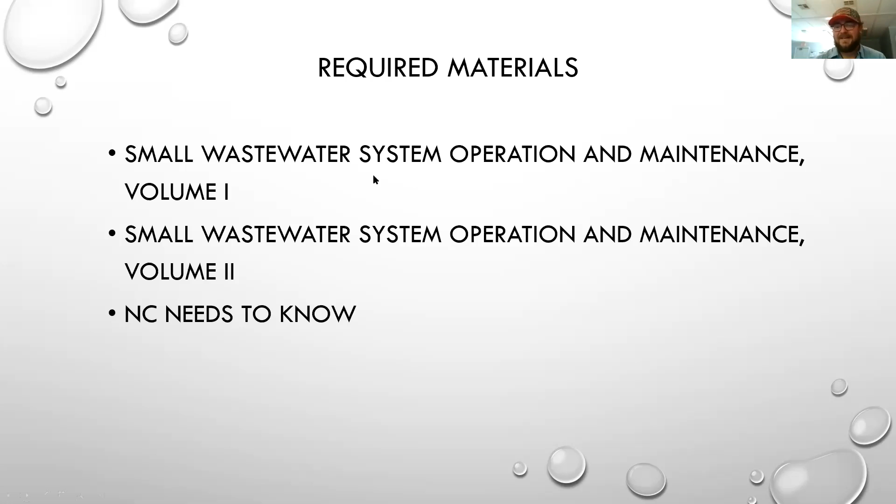In terms of successfully completing the class, what we're looking for is we want you to learn Zoom, which is this application we're using. If you look in your box, you'll see an opportunity where it says chat. You'll open that chat box, and you can see you can type something down there.

We'll be asking questions occasionally in the class, and I want people to respond. It logs and timestamps that, showing you're actually in the class and participating. So we will need you to be able to hit that chat, just keep that little chat box open. What you'll find later also by keeping it open is that it will allow you—right now you're chatting with everyone—but once you start to meet other people in the class, if you want to send just one individual a message, you can do that and nobody else can see it. So that's handy to have.

We'll also expect you to abide, since you're a Western Piedmont student, by the North Carolina Western Piedmont Student Code of Conduct, which means don't cheat on any tests. Make sure that if you attend a session, you don't have somebody else doing it for you. It's on our website. We just put it out there to let you know that we expect you to participate, and for purposes of this class, make sure that if somebody logs on in your name, that it's actually you and not somebody else.

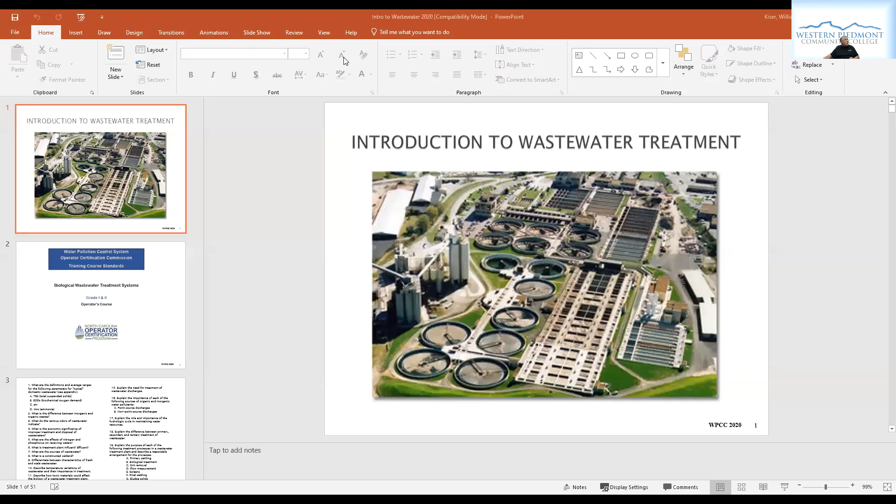When the actual class starts, it'll look something like this. In a given day, we'll have a class, and maybe we'll talk about introduction to wastewater treatment. Do you see that slide? Yes. Okay, so even though I'm looking at the camera, I've got that same slide on the board over here, so I'll be turning and writing on it, then turning back.

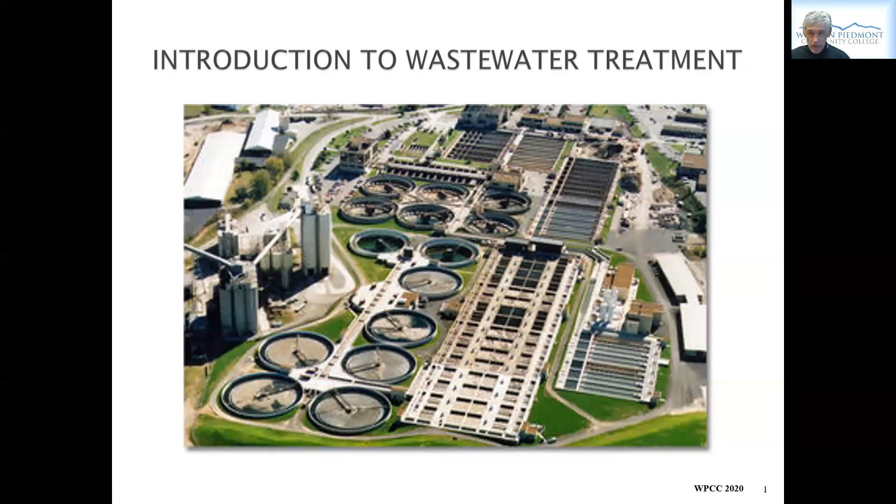There'll be a series of slides, and I'll start each slide with something called the 'needs to know,' which we talked about earlier. It's an outline of each topic we want to cover, like pump, activated sludge, disinfection, laboratory, and tells you what types of questions you might be asked on the certification exam for that topic. This is the cover page, and I'll show you how you can download this. You don't have to buy it.

We'll start off with the needs to know and say, okay, for grade 1, here are the types of things you're going to be asked that we're going to cover today. I'll start the class with this list of questions and end the class with this list of questions. For example, let me get my pen going here.

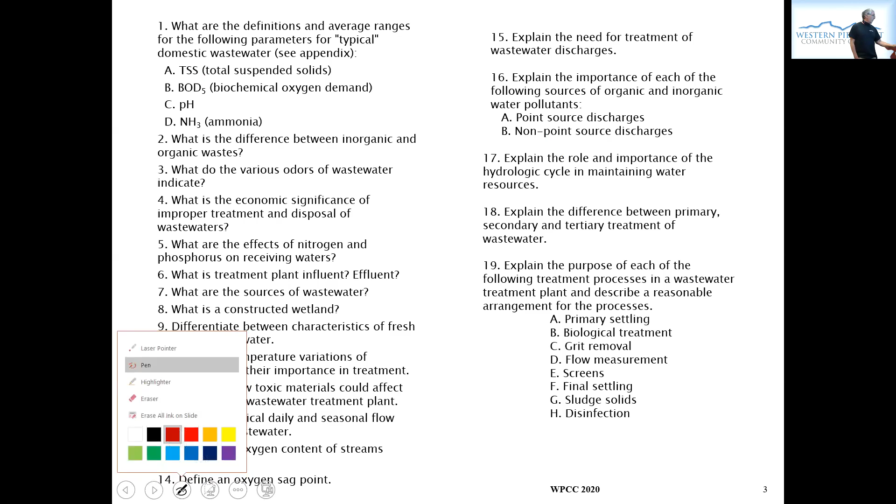The first question is: what are the definitions and average ranges for the following domestic wastewater parameters? We'll talk about that, and get my pen working, sometimes it's a little difficult. This thing gets cranky, so bear with me.

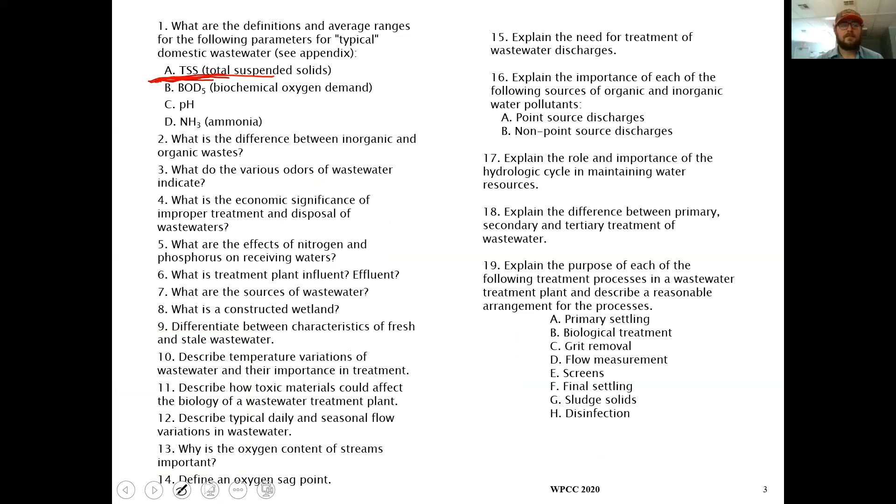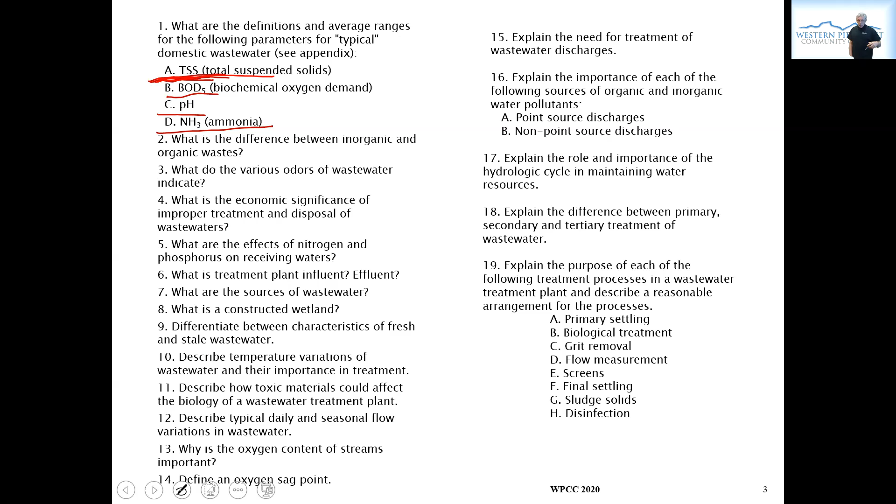So we'll talk about things like total suspended solids, BOD, pH, ammonia, nitrogen, and I'll mark on this slide as I talk about things. At the end of the session, this will all be loaded to the Moodle site where you can download it. You'll get these slides ahead of time, and then you'll get my markups.

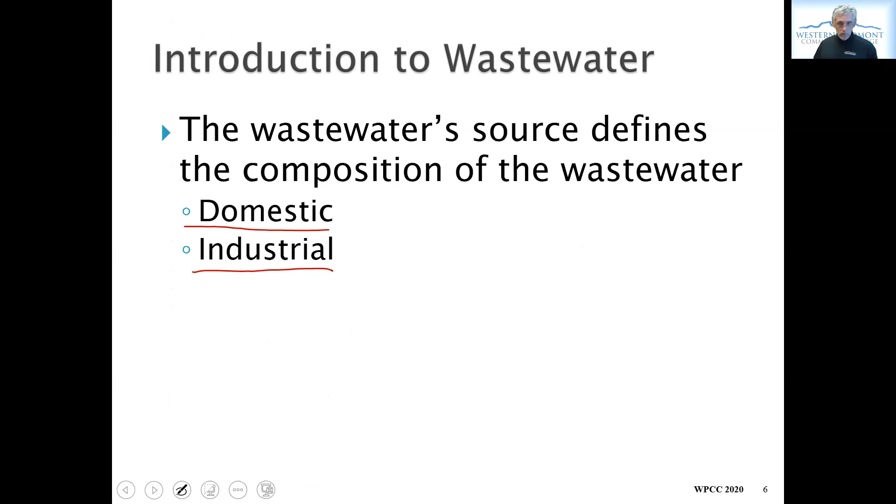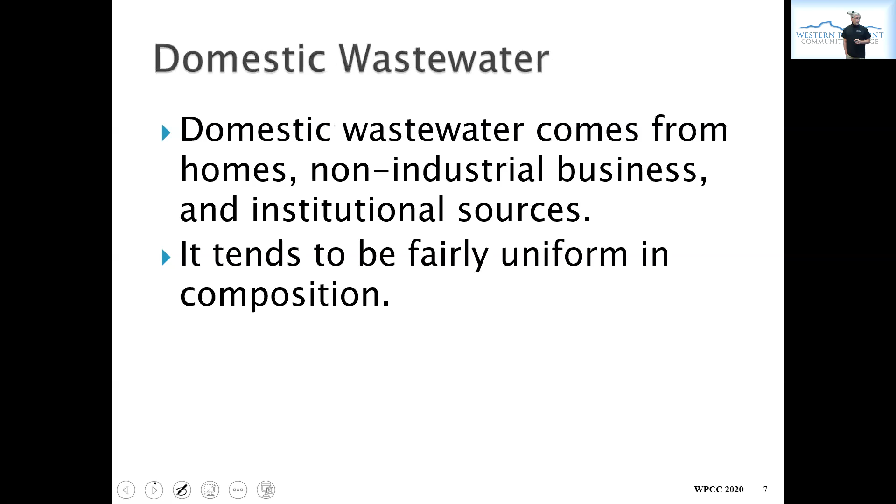We'll talk about what we're going to cover today, then move on to the next slide. I'll go down a couple more slides and say, here we're going to talk about wastewater, and we divide it into two types: domestic wastewater and industrial wastewater. Domestic wastewater comes from homes, from domiciles, from institutions like this college I work at. It tends to be fairly uniform in composition.

Industrial wastewater, on the other hand, is highly variable. It depends on what kind of industry is taking place—it could be a wet industry like a chicken processor, a beef processor, or a dye and finishing operation that uses a lot of water, or companies that don't use water in the process but still have some wastewater. Industrial wastewater is a lot more variable than domestic. At your wastewater plant, if any industries discharge into the collection system your plant serves, that industry has to treat the wastewater, so by the time it comes to you, it has the characteristics of domestic wastewater.

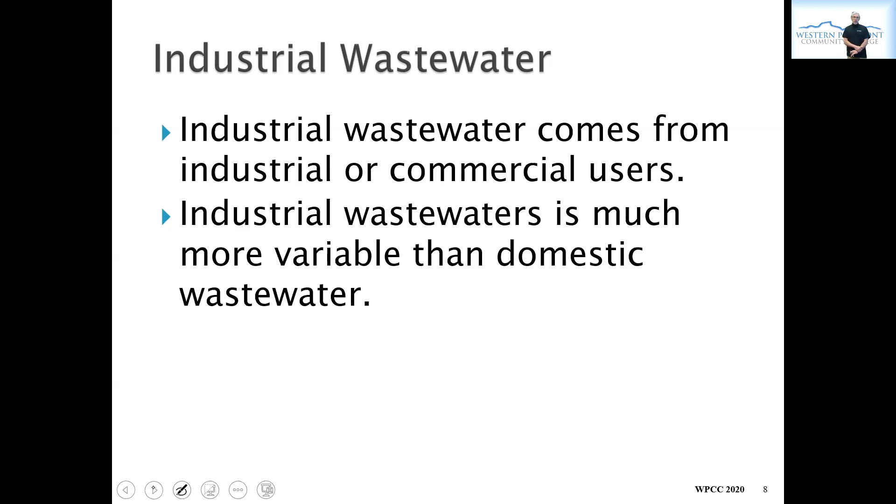When we talk about wastewater characteristics, we can break them down into three main categories: physical characteristics like odor or temperature, chemical characteristics like the different types of chemicals in it, and biological characteristics, whether or not it has pathogens or organisms that can cause disease.

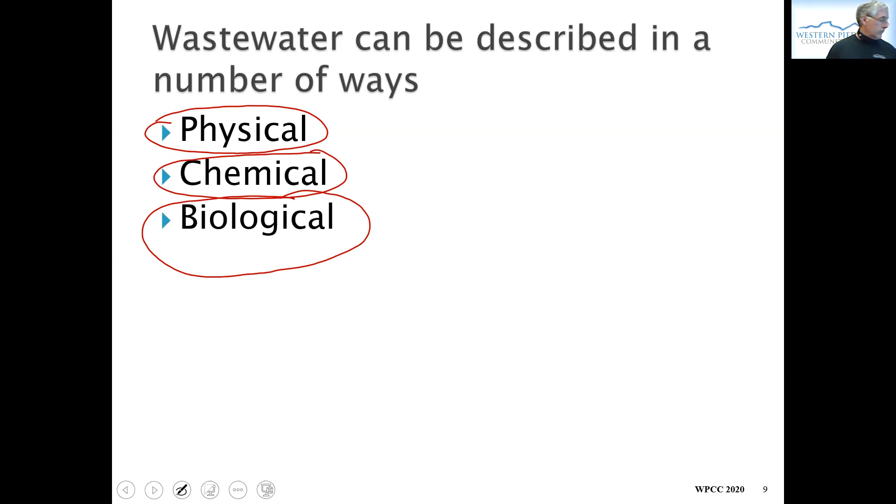In terms of physical characteristics, one thing we use in wastewater treatment is something called an Imhoff column. Do you have one of these at your plant? I'm not sure, I've got a bunch of stuff. Yeah, I've got a bunch of stuff right back here.

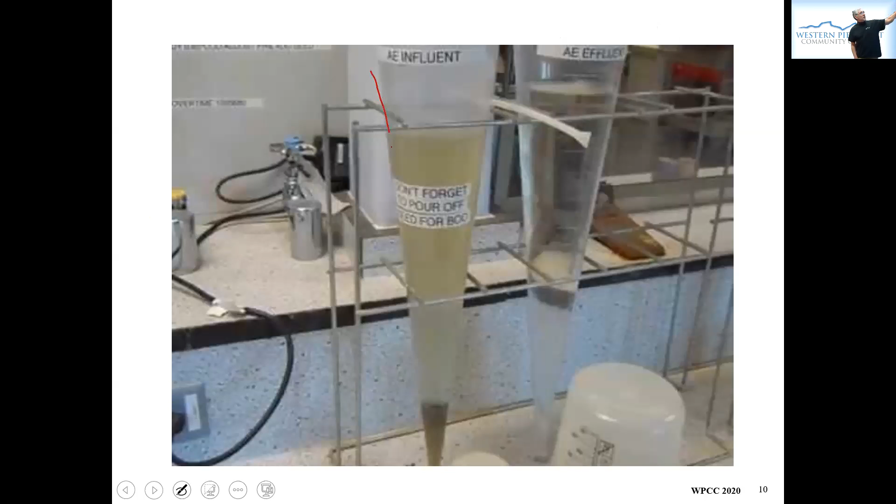It's a cylinder shaped like a cone. You put water in it, let it sit for about 30 minutes, and see how much solids accumulate at the bottom. You measure the line between the solids and the clear water, and that tells you the amount of solid material that'll settle out in the wastewater. By the time you come to the effluent of your wastewater plant, it should be fairly clear water.

So here's one you can see has virtually no solids in it. That's an example of a physical characteristic of the water, one of many. So these things are called Imhoff columns.

I know you're brand new to this and new to the plant, so you're learning both vocabulary and processes. We're real careful to make sure that whenever we use a term that's not common, that's specific to wastewater treatment, we actually define that term and then talk about the concepts. So that's kind of how the class works.

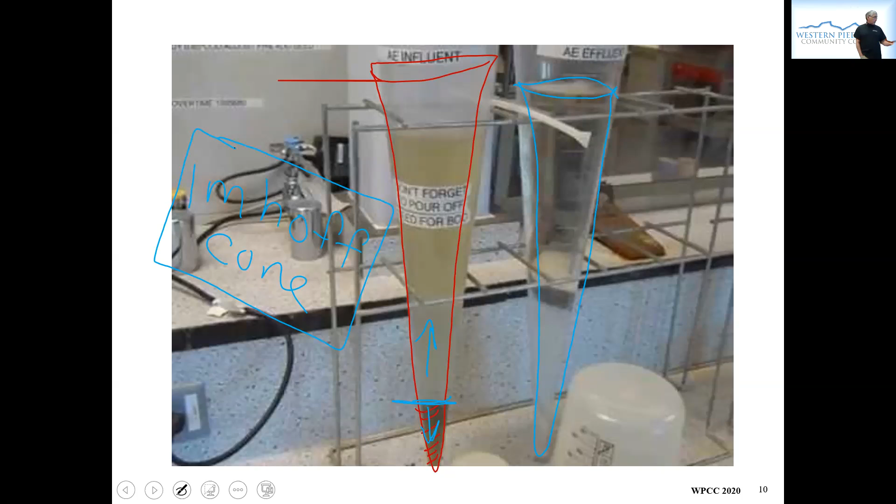Then we'll spend about an hour, and sometimes I'll throw up a blank screen like this so I can do my own drawing. I may have an Imhoff cone sketch, and then I may say, okay...

Wastewater is coming in, and it will settle out at the bottom. Then what you would read off, if this says 10 milliliters, then your settleable solids would be 10 milliliters. So occasionally I'll come up with a blank screen that you won't see in your initial slides, but you'll see them after I mark them up.

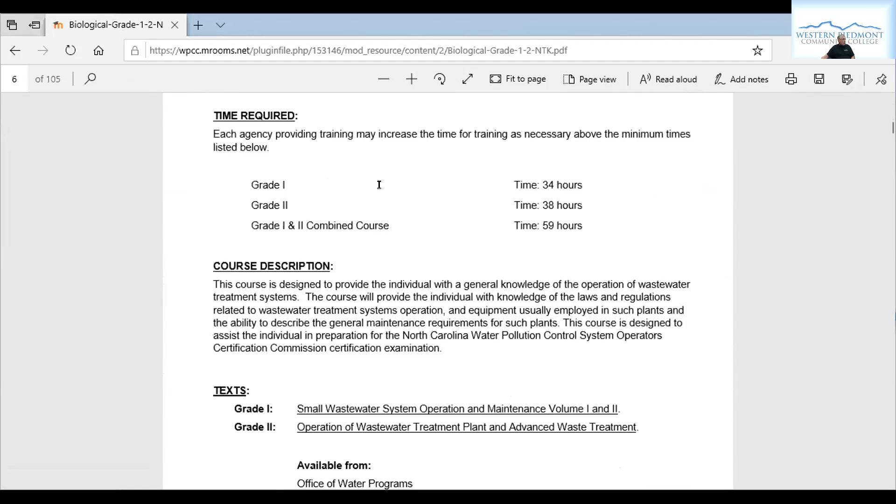And then again, if you scroll through it, you can see - don't let me go too fast here - there's the same thing that I showed on that slide a while ago. So in this book, it asks these questions that you need to be able to answer. That's a good study guide.

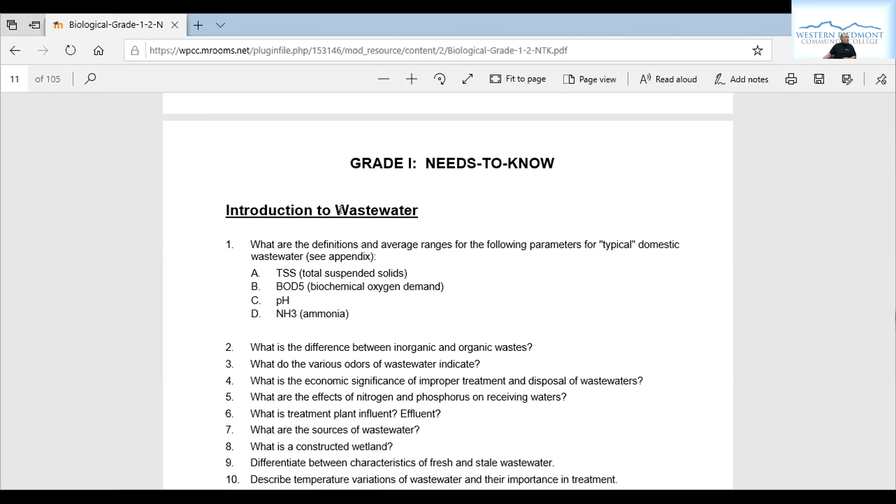So that's available to you by accessing it. I've got some quizzes.

Here's an example of some types of problems you will likely see on the certification exam. You'll be able to take these tests, and I'll show you how to work these problems in our sessions. You'll be able to go to this Moodle site on your own time and take these quizzes over and over as many times as you want.

It's the same problems, but you can come back each time fresh and keep taking it, make sure you get the right answer. You write the question down, solve it, click on whatever answer you think it is, then hit submit, and it tells you whether you got it right or wrong. They're handy to have.

This entire site, even though we'll quit broadcasting in July, will actually be up through September. So even though your class is over, you can keep coming back to this and using it as a reference to help you in your studies so that you're ready to take the exam. That's handy to have.

It's a little tricky to navigate, but you'll figure that out. So we've got some quizzes I'm going to build, and then we've got the actual slideshows for each day.

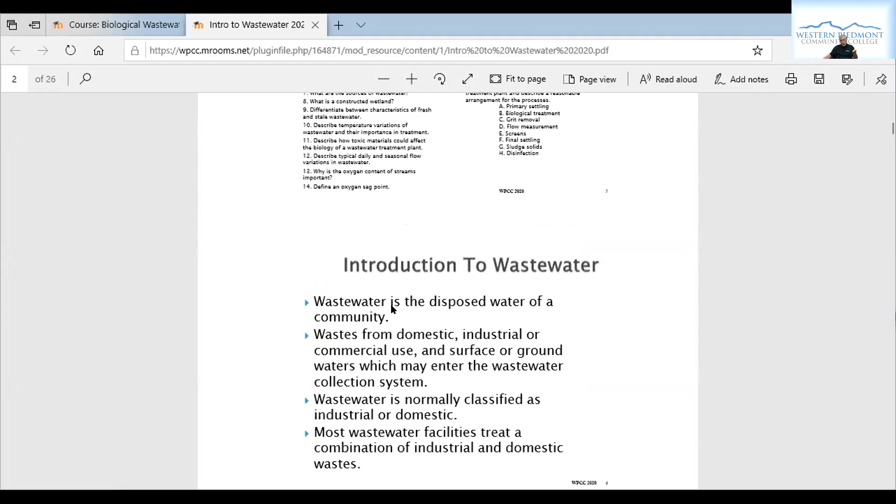Here's introduction to wastewater, that's the actual class that starts on Tuesday. What I just showed you, those slides, you'll actually be able to click on it here, and then it opens up so you can see them yourself. You can print these if you want, or you can just watch my screen.

Did that one come up for you? Yeah, it came up. Okay, good.

Okay, all right. So at the end of it, there'll be a little quiz associated with that module, same thing, asking you some questions about wastewater that you should have gotten from the class.

Again, sometimes you just take these and you don't remember, so you just click on anything and see if you got it right or wrong. Sometimes it's trial by error. You do this enough times, you'll kind of get used to it. The same questions keep popping up.

Again, you don't get graded on it. I do see your attempts and how well you did, but I don't score it. What that does for me is tell me, with all the students, how well I'm doing in terms of getting you the information. And you use it on your end as practice to see how well you've learned it. You can take these over and over as many times as you want. It's a pretty good resource.

That's introduction to wastewater, that's Tuesday's class. Then Thursday's class is wastewater collection, grease traps, and pumps. So each topic is in there that we'll actually go through, and I'll continue to add content and stuff that's useful to you along the way.